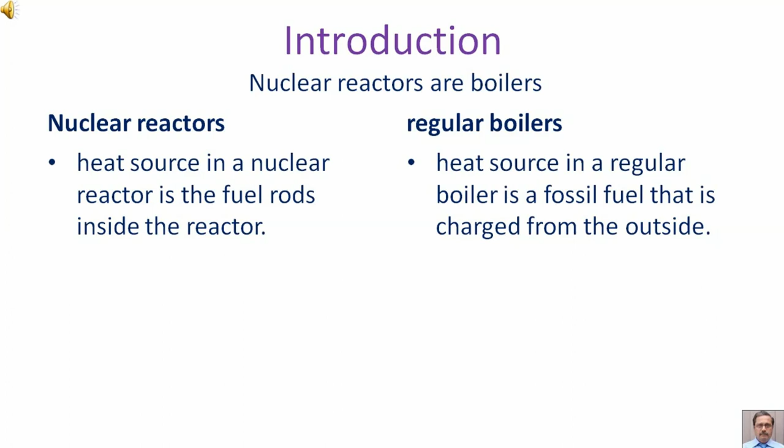Nuclear reactors are boilers. In case of nuclear reactors, the heat source is the fuel rods inside the reactor. In case of regular boilers, the heat source is a fossil fuel charged from the outside. What makes a boiler in a nuclear reactor more difficult to operate is that turning off this internal heat source is harder, because stopping the nuclear reaction is more difficult and time consuming than closing a fossil fuel feed valve.

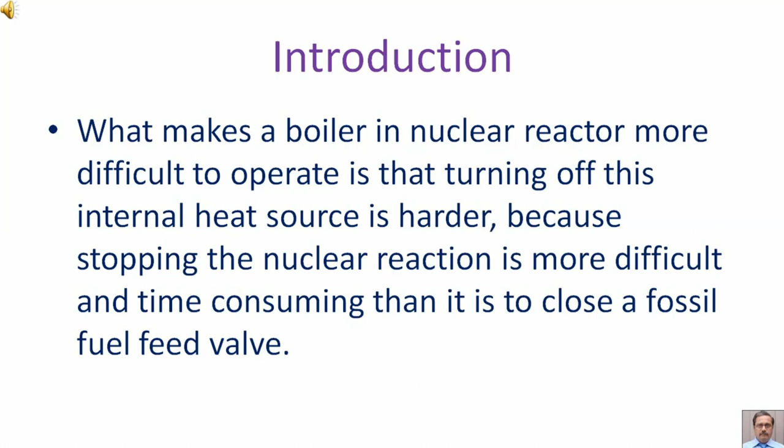It is essential to keep the fuel rods covered with cooling water so that they will be protected from overheating and melting. The accurate knowledge of the level of cooling water both inside and outside the core is essential.

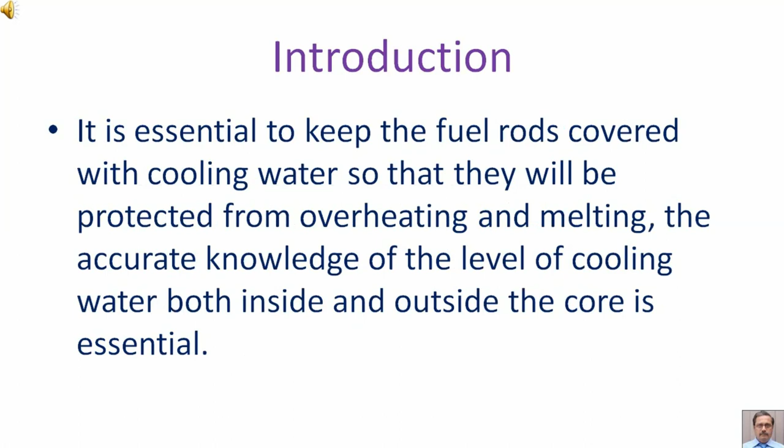Light water reactors, that is LWR. Reactor types using light water as a neutron energy moderator and heat transfer medium together with slightly enriched uranium fuel have become the dominant technology. There are two types of light water reactors: pressurized water and boiling water reactors.

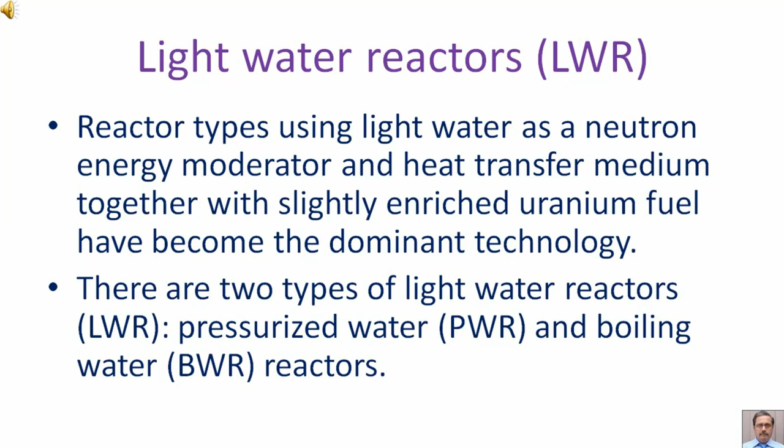Here we are explaining the difference between PWR and BWR, that is pressurized water reactors. PWRs prohibit boiling in the core and use secondary heat exchangers or steam generators to produce steam, which powers the turbine generator. Boiling water reactors, BWRs, produce steam directly in the reactor core and pass the steam to the turbine generator.

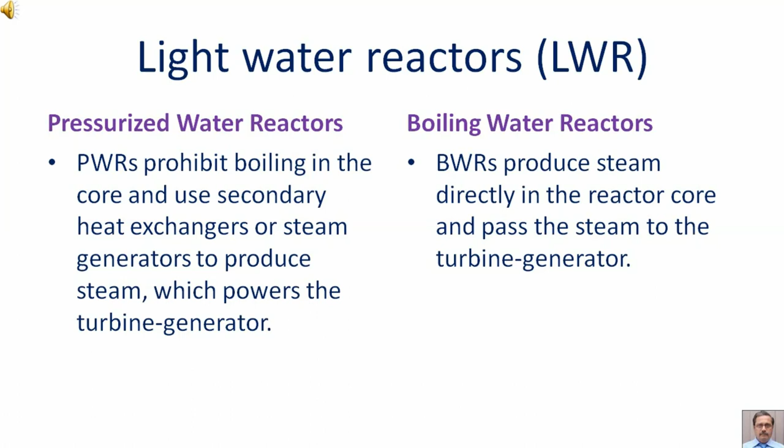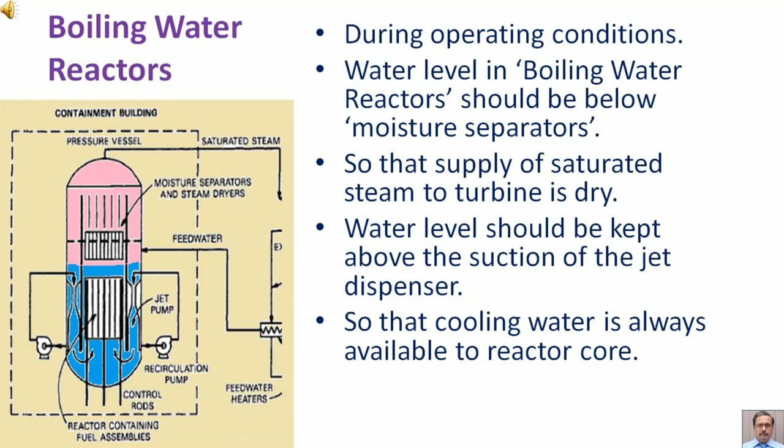During operating conditions, water level in boiling water reactors should be below the moisture separators so that the supply of saturated steam to the turbine is dry. Water level should be kept above the suction of the jet dispenser so that cooling water is always available to the reactor core.

This is the reactor core, and this line indicates the shroud around the reactor core.

The figure in the next slide shows a boiling water reactor BWR and the traditional method by which the cooling water level is measured in many existing BWRs.

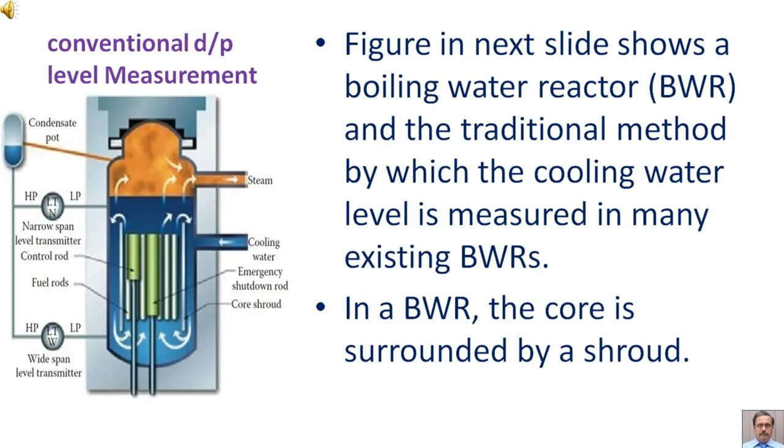In a BWR, the core is surrounded by a shroud. BWR, Boiling Water Reactor, cooling water level measurement.

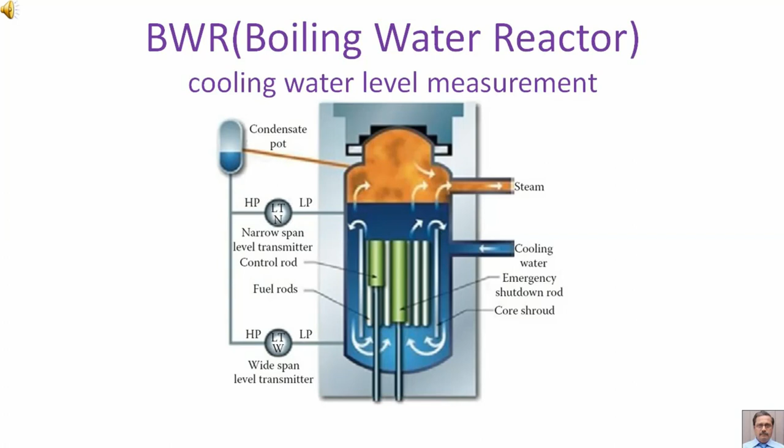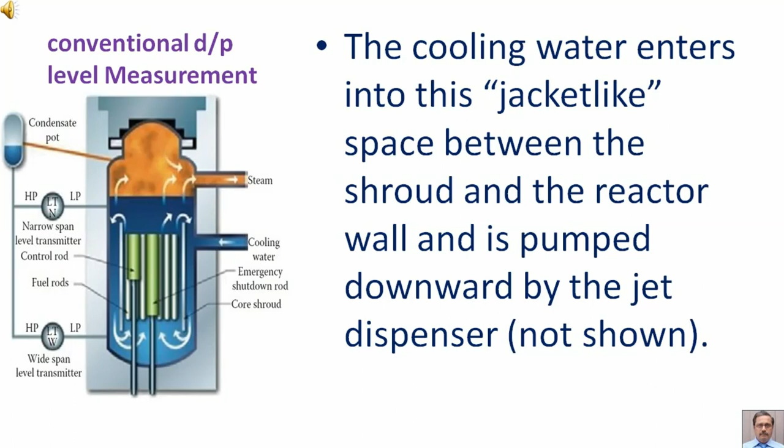This is the jacket-like space between the shroud and the outer wall of the reactor. The cooling water enters into this jacket-like space between the shroud and the reactor wall and is pumped downward by the jet dispenser. The jet dispenser is not shown in this diagram.

This space is in-core and this space is out-core, or ex-core. Water travels down ex-core on the outside of the core and then rises up in-core inside the core. As it rises, the fuel rods heat it and it starts to boil.

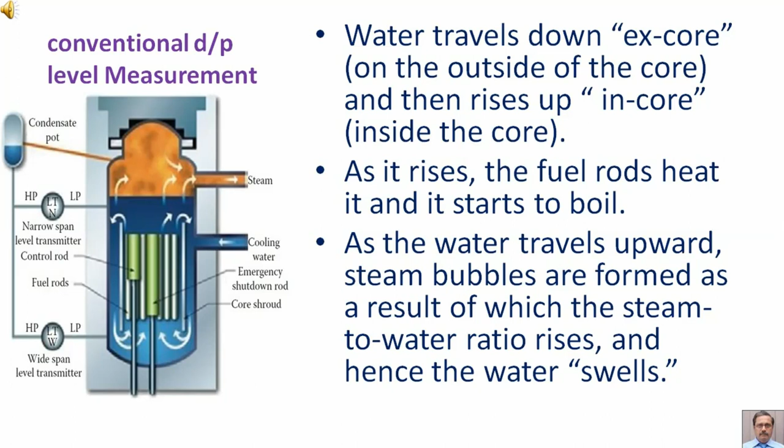As the water travels upward, steam bubbles are formed, as a result of which the steam to water ratio rises and hence the water swells. This space is ex-core.

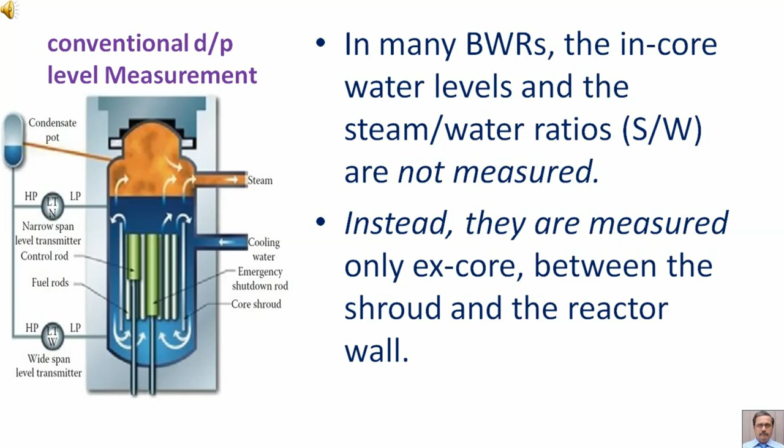In many BWRs, the in-core water levels and the steam to water ratios, S by W, are not measured. Instead, they are measured only ex-core, between the shroud and the reactor wall.

Under emergency conditions, when the cooling water pump stops and if the ex-core water level drops below the suction of the jet dispenser, which otherwise would pump the water down into the core, this ex-core measurement no longer reflects the in-core water level.

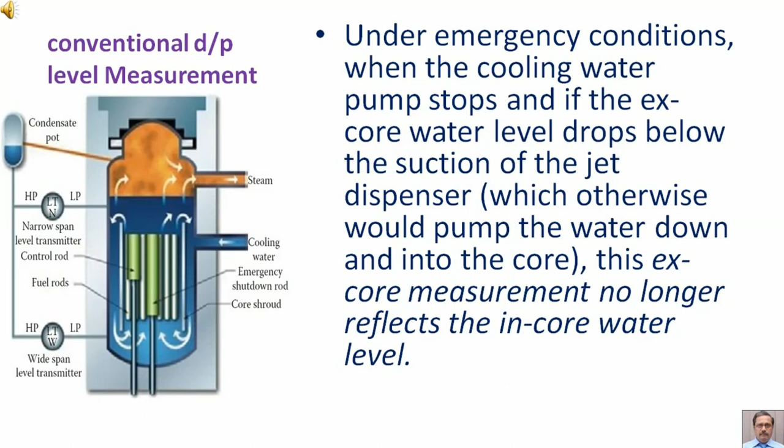Consequently, ex-core level measurement can become useless during loss of cooling emergencies, such as when the electric power to the cooling water pumps is lost.

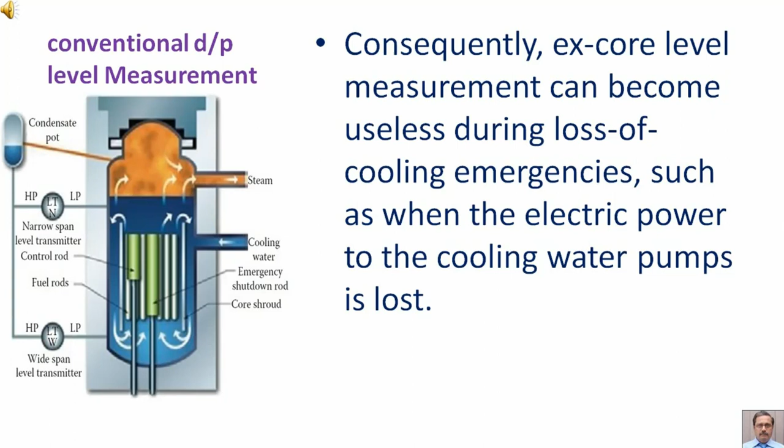This is LTN, level transmitter narrow range. This is LTW, level transmitter wide range.

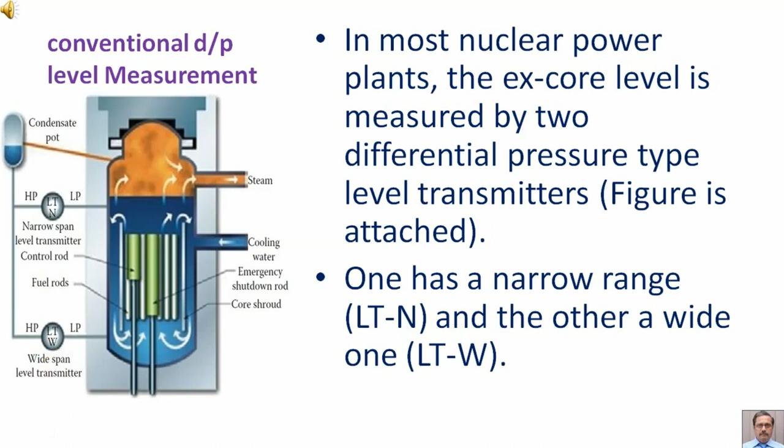In most nuclear power plants, the ex-core level is measured by two differential pressure type level transmitters. One has a narrow range, LTN, and the other a wide one, LTW. The narrow span transmitter LTN is naturally more sensitive and is a better indicator of the core boiling water level, that is of the location of its surface, while the wide range transmitter LTW detects the total core hydrostatic head in the reactor.

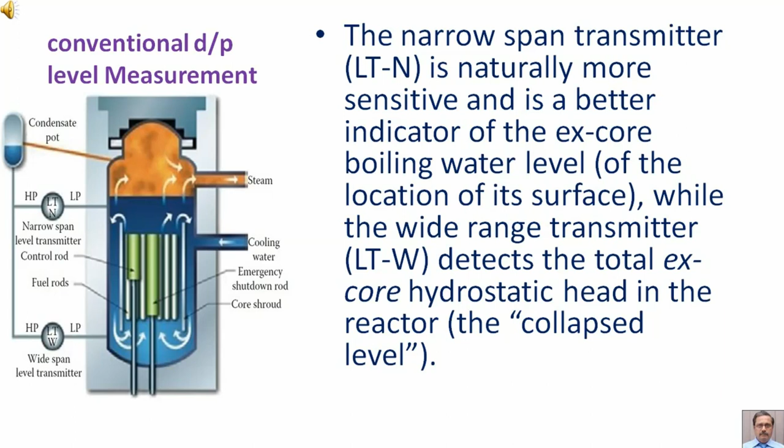This is the condensate pot and this is the condensate drain line, which is joining the condensate pot with the steam space.

Almost without exception, these transmitters are of the differential pressure type and are both installed with condensate pots which provide their water filled reference legs, that is wet legs, that are connected to their high pressure sides.

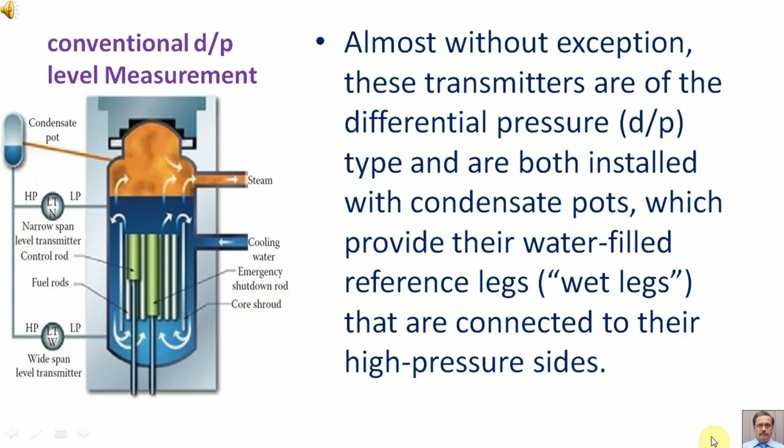In order to cool and thereby condense the steam on this high pressure side, the condensate pots are usually uninsulated, and the excess products of condensation drain back into the reactor through the connection on the side of the pot. So the condensate level in the pot remains constant.

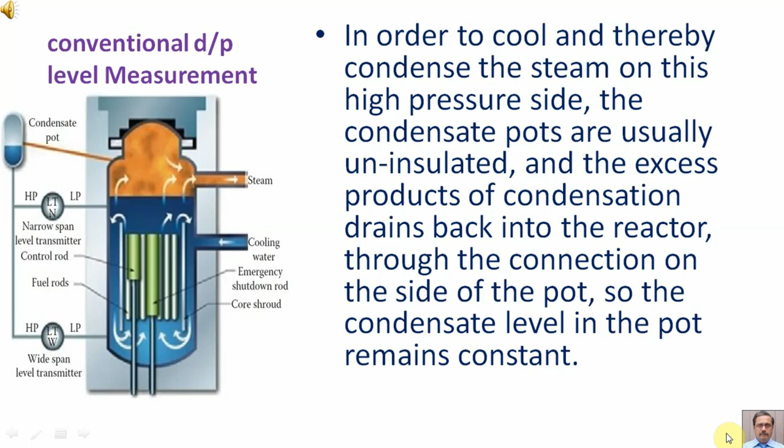The level transmitters shown in the figure are both inverse acting. If the level rises, the transmitter output signal drops, because the hydrostatic heads on their high pressure sides are constant and correspond to the weight of a water column generated by the condensate pot.

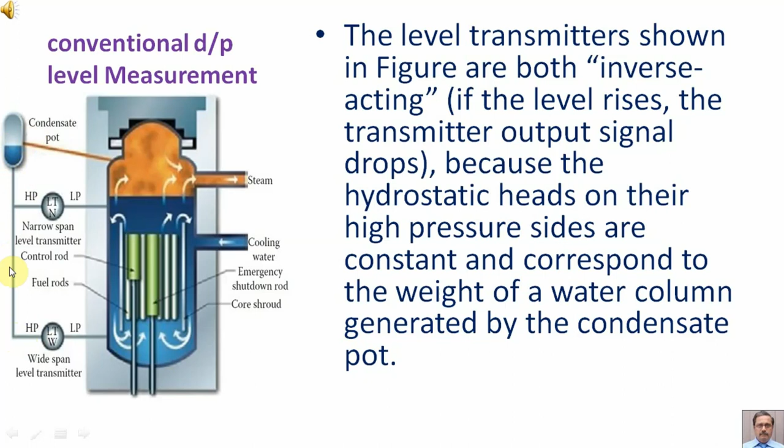This water is at ambient temperature, because both the pot and the connecting piping are uninsulated. Therefore, a maximum ex-core level inside the reactor results in a zero signal from the transmitters, while a zero level causes a maximum output signal.

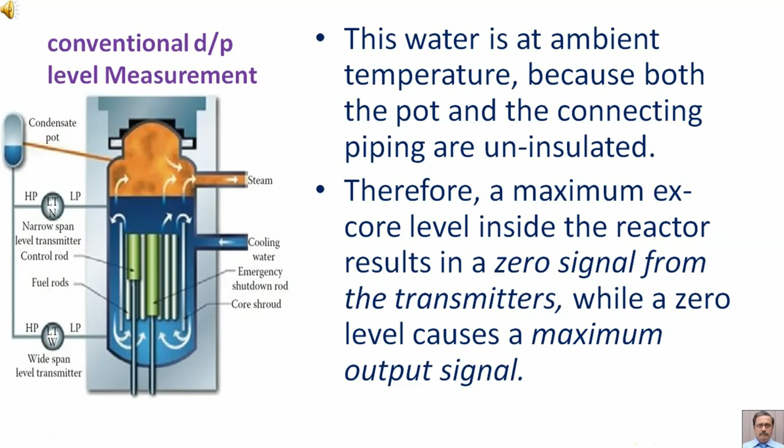The reliability of this measurement depends on the assumption that the wet leg is full of condensate and that it is at ambient temperature.

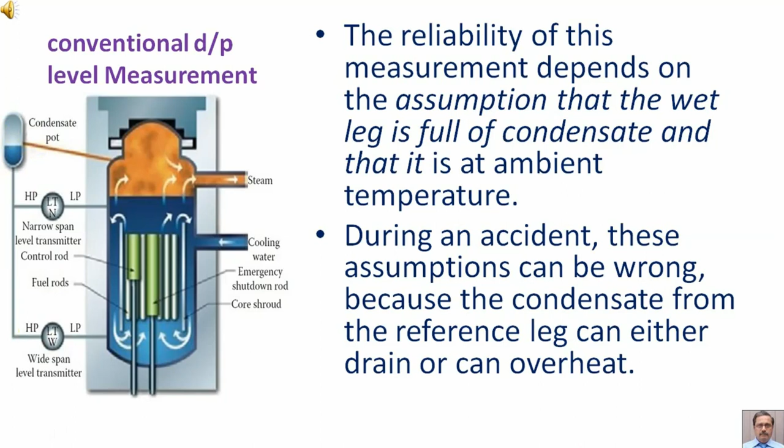During an accident, these assumptions can be wrong, because the condensate from the reference leg can either drain or can overheat.

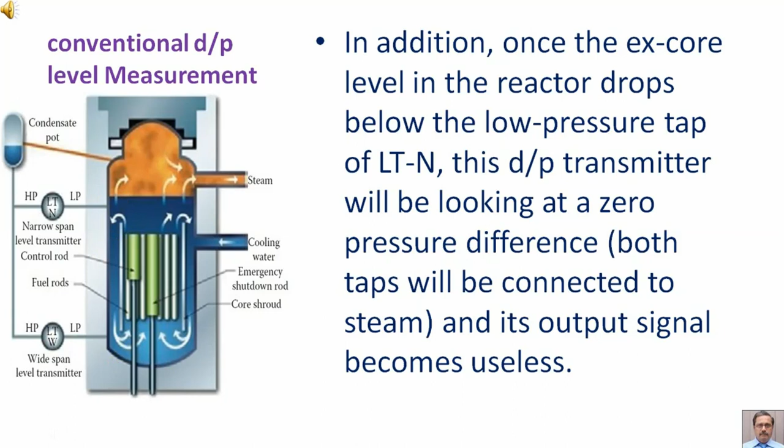This is the low pressure tap of the LT-N. In addition, once the ex-core level in the reactor drops below the low pressure tap of LT-N, this differential pressure transmitter will be looking at a zero pressure difference. That is, both taps will be connected to steam, and its output signal becomes useless.

Even under normal operating conditions, because the water in the reactor is boiling, both differential pressure cells detect the hydrostatic head, that is mass of water, and not the level.

This condition also varies with load, because when the steam pressure drops, the steaming rate increases and swelling occurs, and when the steaming rate is reduced, the steam pressure rises, and shrinking occurs.

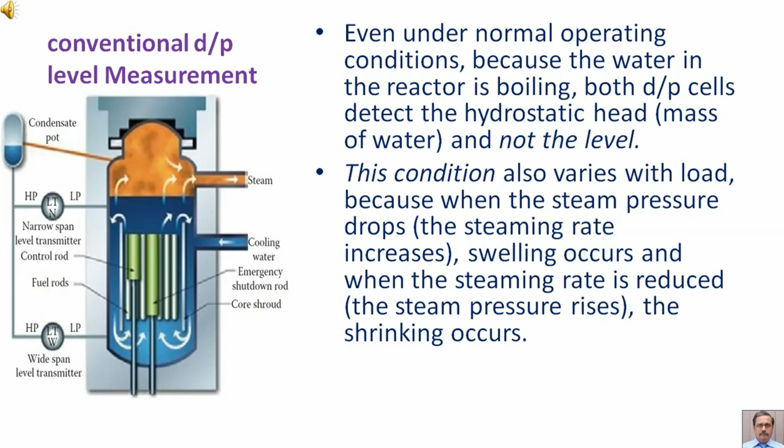The more bubbles form, that is swelling, the higher is the actual level, but lower is the density of the ex-core water column, and therefore the detectors will under-report the level.

Inversely, as the steaming rate drops, in the shrinking phase, the density increases, the actual level drops, while the level reported by the transmitter increases.

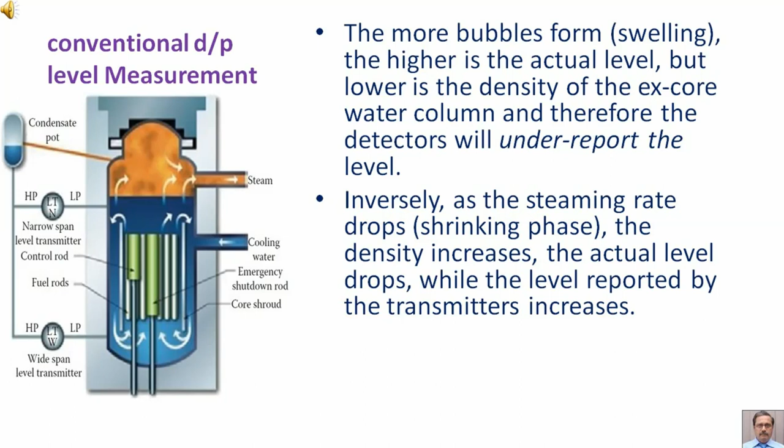In other words, when the surface of the boiling water rises, swelling, the level reading drops, and when the boiling rate is reduced and therefore the water level drops, the level reading rises.

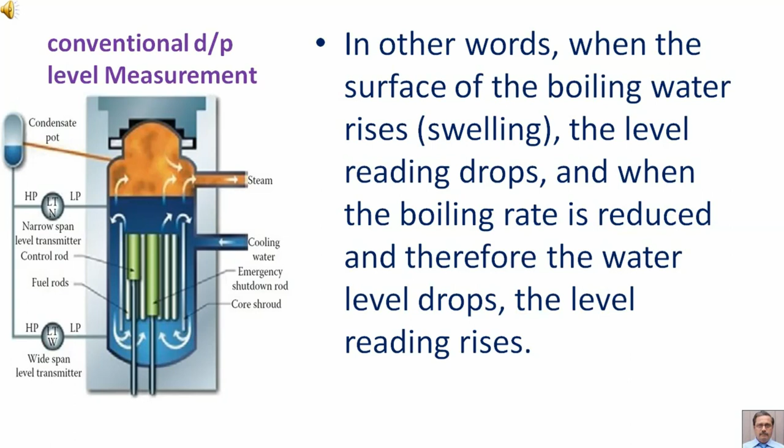Some operators and designers do not realize that the differential pressure cell outputs can correctly indicate the level of the boiling surface of the cooling water only if the measurement is corrected for density changes.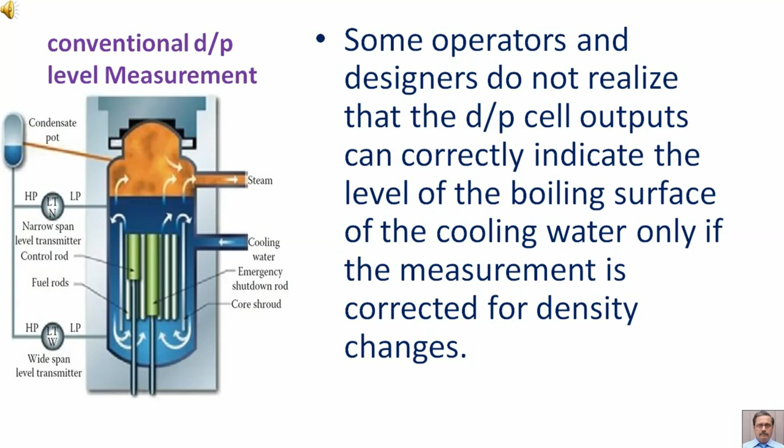Therefore, these level measurements are either unreliable or useless. Since the operators know that these level measurements are unreliable, they often disregard them, disconnect the automatic level controllers, and try to manipulate the level manually.

This is dangerous and unacceptable.